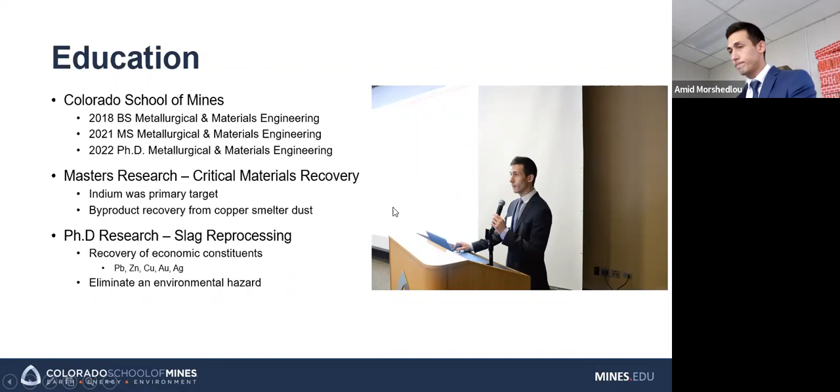For my professional background, in 2015 I interned for an oil and gas company called Extractive Energy. Most of what I did there was FSRU applications and a little bit of LNG, but mostly regas stuff. I did a lot of plant design, layouts, P&IDs, things like that. Then in 2017 and a little bit in 2018, I worked for a company called Verite Forensic Engineering. They were a small consulting engineering firm that did mostly failure analysis and fire investigations. For them, I did mostly metallurgical failure analysis.

And then I've also done a little bit on some tailings reuse in 2019. That was a project where we upgraded some silica.

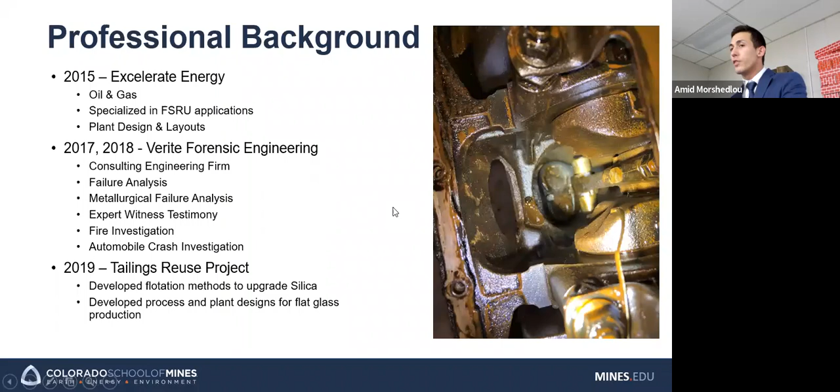And so with that out of the way, let's get down to the meat and potatoes. So this is the mining engineering seminar. I'm not going to pretend to understand to the level that y'all do about how to get things out of the ground. But a little review for what happens once things are out of the ground.

So we have extractive metallurgy. In most commodities, I have copper here as an example. There are two general categories: pyrometallurgy and hydrometallurgy, and there are exceptions or other processes. But shown here, I have two general processes for how you might process a copper ore body using pyro and hydro. In pyro, you normally start off with smelting. After that, you would go to converting, which normally just gets rid of iron and converts copper sulfide to a blister copper. From there, you would cast the copper into anodes, which would then be electro-refined.

On the hydro side of things, you would leach it, normally with sulfuric acid, but there are other solutions you can use. From there, you would go do some sort of upgrading step; solvent extraction is most common. After solvent extraction, you have a relatively high-grade copper electrolyte, which you would then refine using electrowinning.

So we're going to focus on this left side here. Most of what I do is use hydrometallurgical techniques on pyrometallurgical byproducts. So that begs the question: what are the pyrometallurgical byproducts? A really common one is slag, which is a product of most smelting and converting processes. At least with copper and other commodities, a converter slag is recycled back into the smelter, but that doesn't always happen.

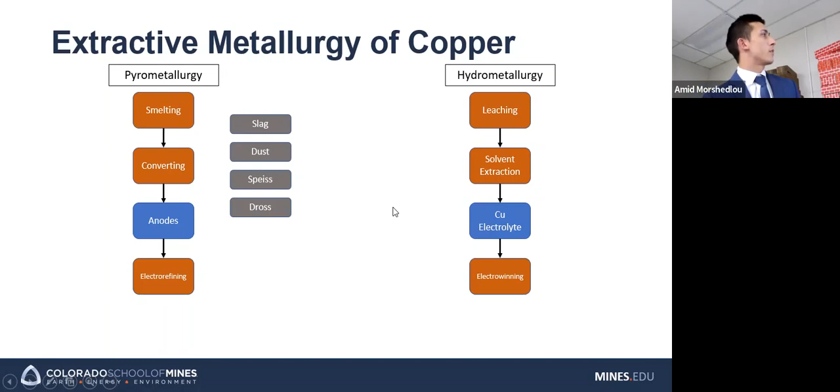So with that out of the way, I'm going to start talking a little bit more about some of the things I've worked on, starting off with recovering indium from smelter dust. And if y'all have some really deep and important questions about this topic, Joseph Troba here in the audience did his Ph.D. on this, so some of those might be best directed to him.

So a little bit of background on the overall goal of the project. This was sponsored by CMI, the Critical Materials Institute, and Rio Tinto, their Kennecott facility specifically, located in Utah right outside of Salt Lake City. The overall goal was to develop some methodology to economically recover indium from mid and/or waste streams in the Rio Tinto circuit.

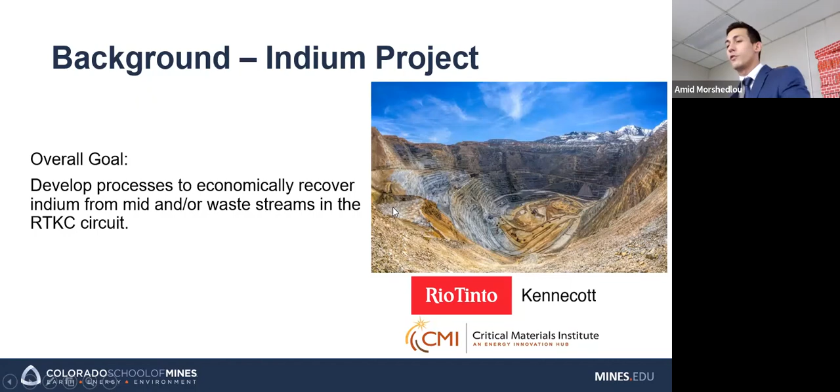So some more background on Rio Tinto. They can be categorized into four main components. There's the mine - you guys all know what mines do, so I don't have to explain that. There's the concentrator, which takes the ore and does comminution and beneficiation. Beneficiation is done through flotation at Kennecott.

The outputs of the concentrator are copper concentrates. Those concentrates get sent to a flash smelter and then to a flash converter. And the anodes that come out of the flash converting system are electrorefined into copper cathodes that are then sold off as a product.

So it begs the question, where in this system are we going to get our indium? Well, there's a few things we can look at. Early on, we looked at some of the samples in the concentrator. If we can improve the grade of indium going into the downstream processes, that's more indium we can target later on. We found that really wasn't going to be feasible for a number of reasons.

Primarily, the indium was not upgraded in specific mineralogies, so it would have been hard to process without some sort of chemical means. We ended up going after indium in the flash smelter.

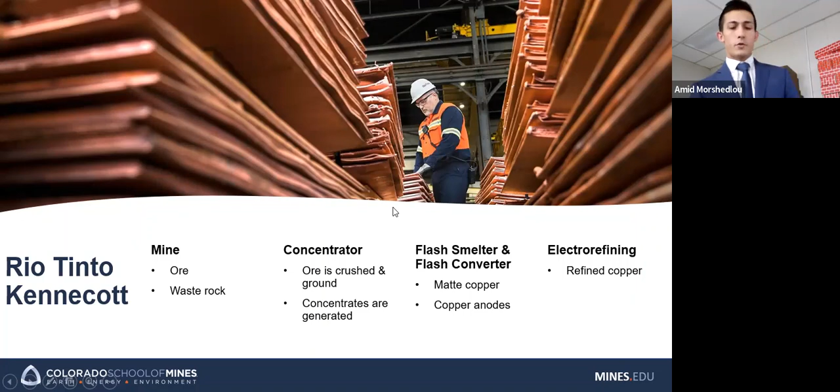This right here is a flow sheet of it, and what we took it from was the electrostatic precipitator specifically. So during the smelting process, some elements such as indium can become volatilized and will go with the off gases. Additionally, some of the ultrafine particles will just get carried away with the off gases.

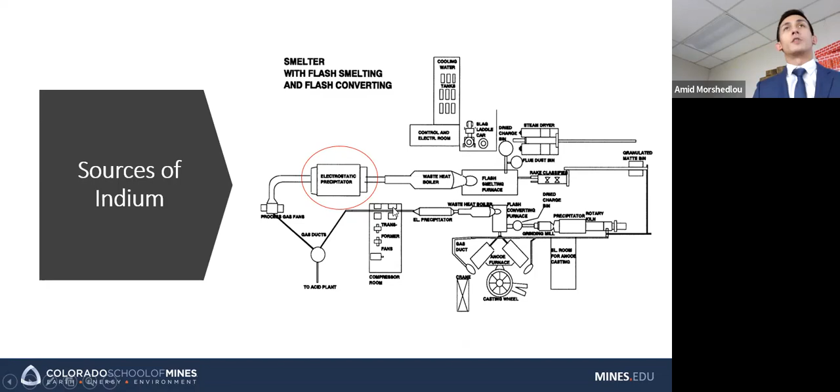Because of environmental regulations, these off gases need to be processed. Part of that processing is running them through an electrostatic precipitator, which does a few things, but the big one is it condenses some of the vapors into solids, and all of these already fine solids get collected so the gas can be processed relatively solid free. So that's the source of indium that we're targeting.

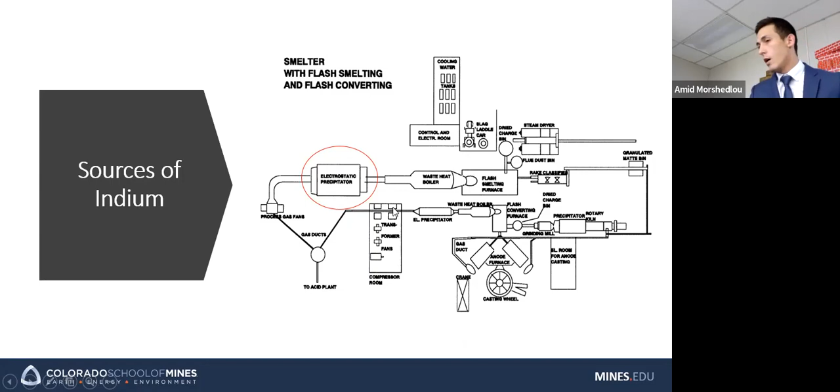And so what happens to this dust? Normally, if we don't do anything with it, ideally it gets recycled back into the smelter. That's because it's about 20% by mass copper, and Kennecott is a copper facility, so they want to process that copper because it's the primary product. But they can't, and that is because of bismuth and arsenic contamination.

Both bismuth and arsenic cause problems both in copper production and in the final copper product. On the refining side of things, they cause current efficiency issues and a variety of other things. In the final copper product, they can reduce conductivity, cause grain boundary wetting, and a variety of other problems.

And then also, cadmium is something we want to look at. That's because another target of the project was to produce cadmium telluride, and we need cadmium to do that. So with this material specifically, what are our general goals? Well, one, we want to recover indium - it's the primary goal.

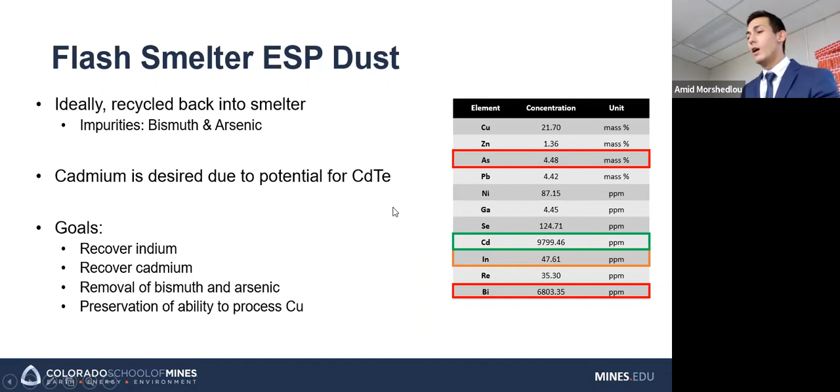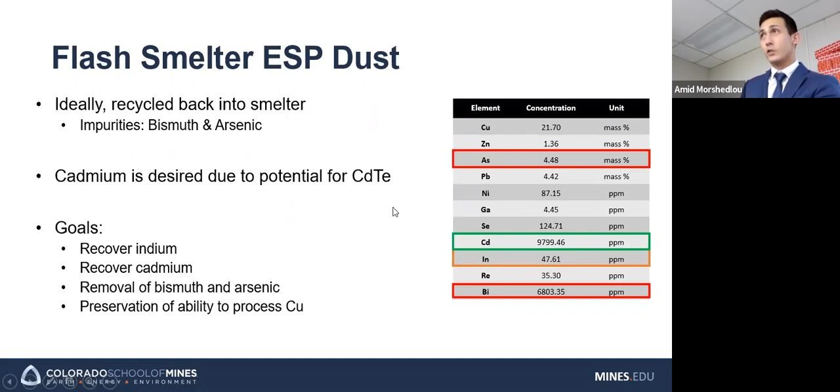But we also want to recover that cadmium. We also want to remove bismuth and arsenic because it inhibits copper production. And we also want to preserve the ability to process copper, since copper is the primary product. So whatever we do to this pyrometallurgical dust, we need to do it in a way that the primary economic driver, being copper, can still be the primary economic driver. So what do we do?

We looked at a few things and settled on water leaching. The reason this worked is there's a pretty high sulfur content in the dust already, and also some of it was copper sulfate. So what happens when we subject the dust to water is we get some of the sulfur reacting with the water to form some sulfuric acid, not much, but enough to get the job done. And so we get two products from this, a leachate and a residue. The leachate is the aqueous phase, it's the solution, and the residue is the solid material left behind.

These percentages I'm showing here are recoveries, the amount of material that reports to each phase. We can see that we're getting a good chunk, over half of the copper going to the leachate, with about a quarter of the cadmium and not much arsenic. So the leachate is mostly copper. On the residue side of things, pretty much all the indium stays there, most of the cadmium, all of the bismuth, and the majority of the arsenic. And then there's also a good chunk of copper there as well.

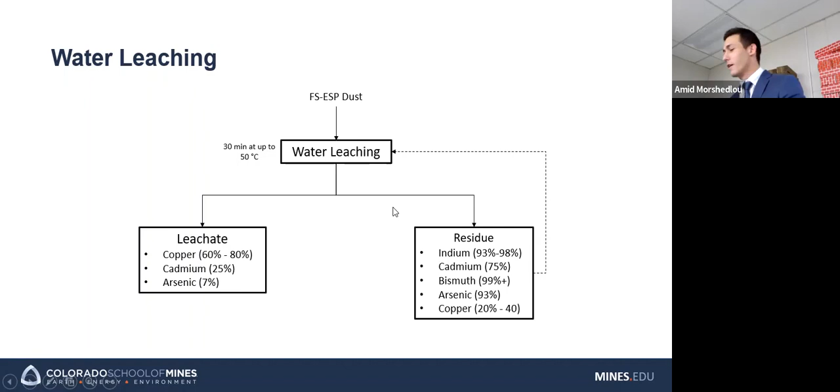And so from here, further processing can be done. Joe can talk about this if y'all are interested, so reach out to him later. So this is one of the things that we looked at.

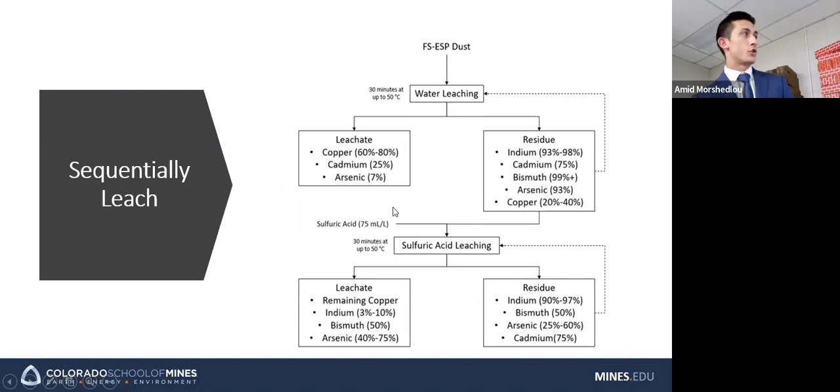Another thing we looked at was doing water leaching first. From here up, it's the exact same as the last slide I showed you. But what we'll do is take this residue and leach it with sulfuric acid. And so the remaining copper goes into solution, along with some of the indium, half of the bismuth, and a good chunk of the arsenic. The residue gets upgraded in indium, and some of the impurities are reduced, and cadmium still pretty much stays there.

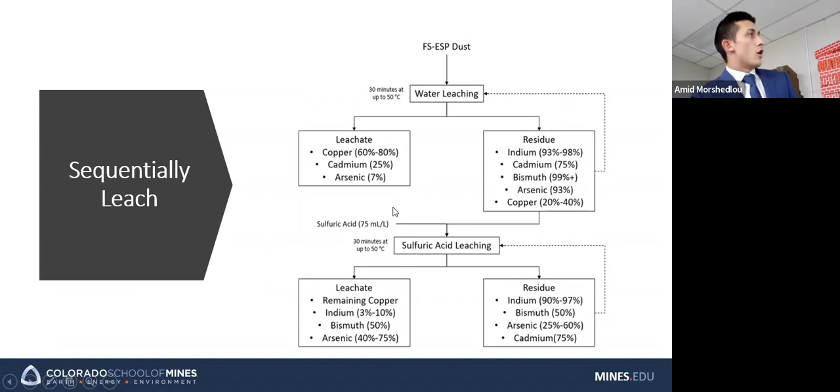One of the benefits of this is the remaining copper gets converted to solution so that it can be processed that way. A downside is the bismuth and arsenic go along with it, so that may not necessarily make sense. That said, if you're going to recover the indium, you need to do some sort of processing to this residue anyway. And again, that's what Joe looked at.

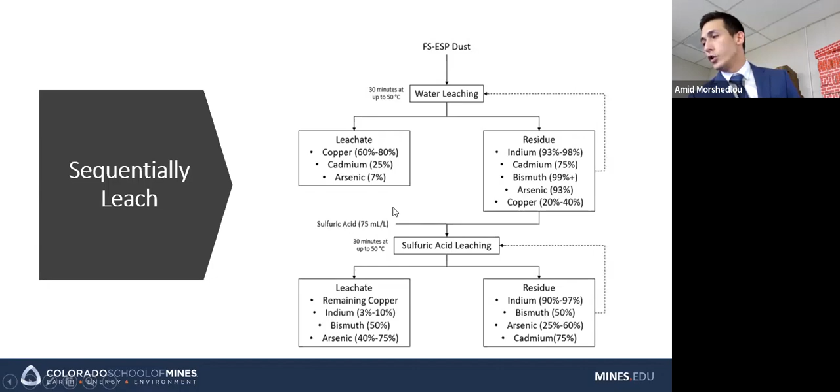So on to the next thing. We're going to talk about recovering some constituents from slag, which is what I'm working on right now.

We are working on slag from La Oroya, a metallurgical complex that was operating in Peru. The overall goal of this particular work was to develop methods to process their slag and recover a variety of valuable constituents in that slag. It was sponsored by the Center of Mining Sustainability here and a university in Peru called UNSA.

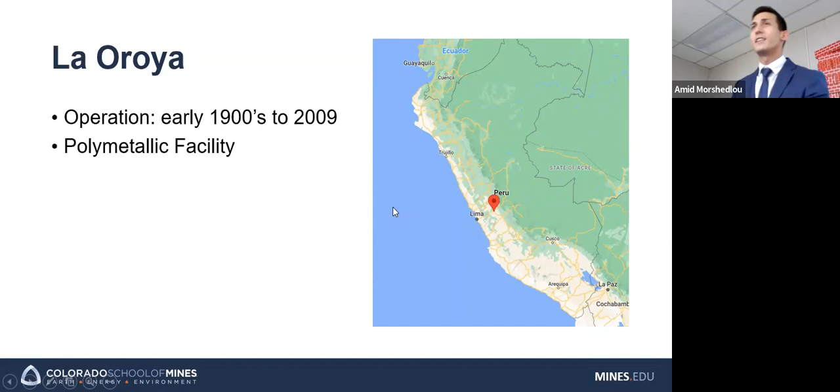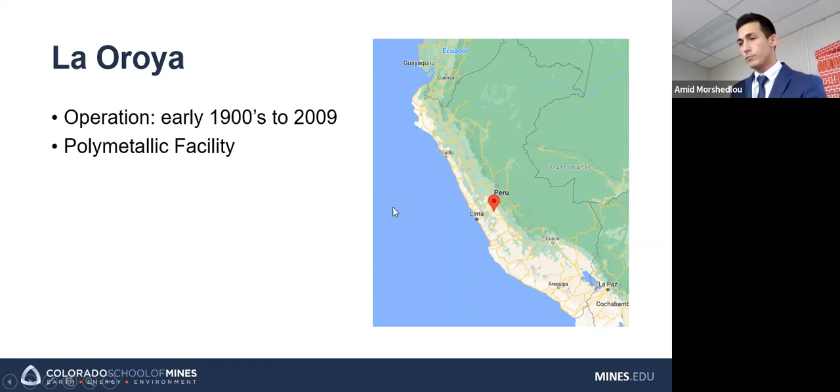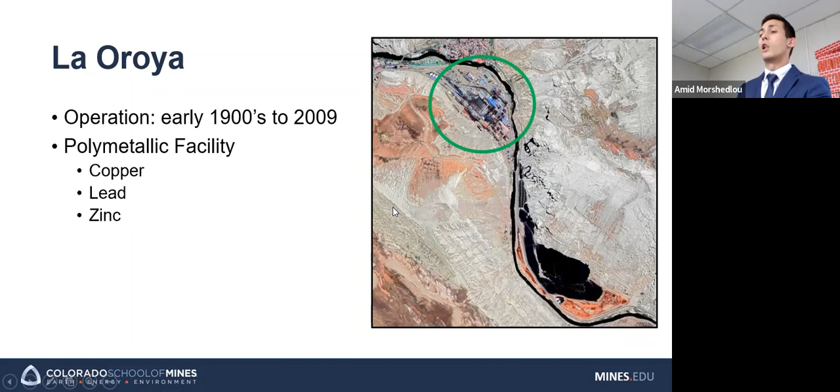So like I said, it is a polymetallic facility, and its primary products were copper, lead, and zinc, but it also produced a fairly high number of byproducts, including gold, silver, cadmium, tellurium, bismuth, indium, thallium, arsenic, etc. There's a number of them. And so, like I said, it got shut down in 2009.

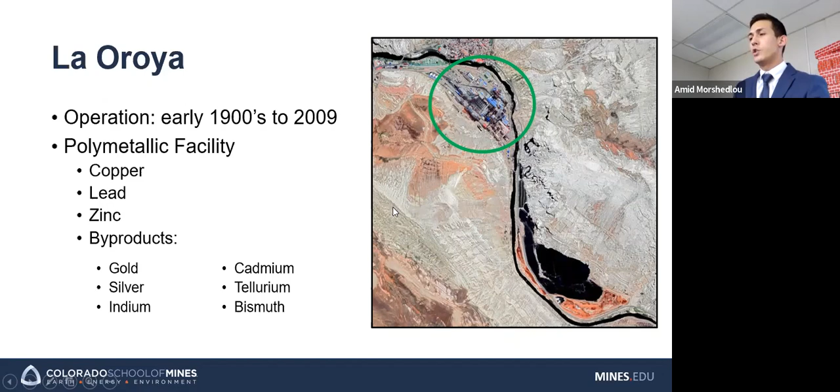So the slag created two environmental issues. One is that it would release toxic elements into the atmosphere through mechanisms like acid rain. Also, some of the slag particles were pretty fine, so you would get quite a bit of dust pollution into the area, and that causes a variety of issues.

So where did the slag come from? Well, this is a polymetallic facility, and two of their primary products are copper and lead. This particular slag pile is a 60-40 split between copper slag and lead slag. The copper slag is from their copper reverb furnaces, and the lead slag is from their blast furnaces. There's about 14 million tons of this stuff.

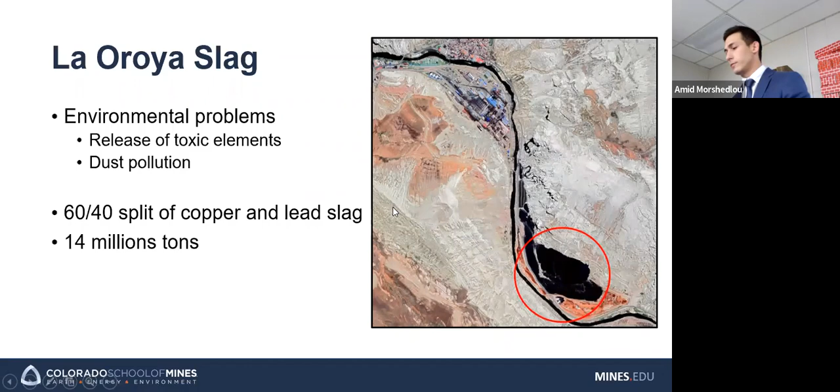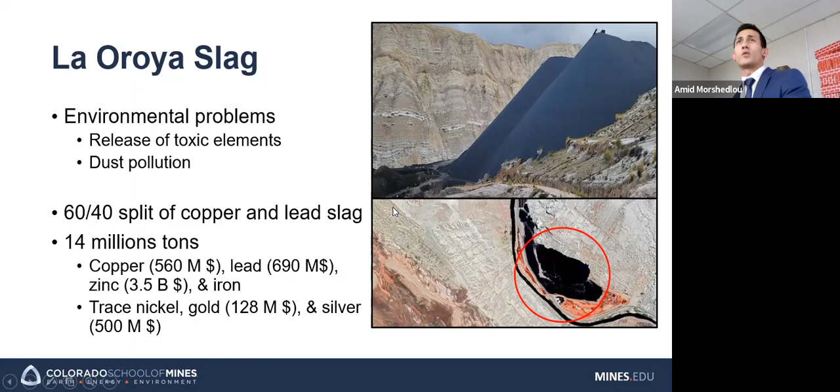So what's in this pile? There's copper, lead, zinc, and iron as the big components. There's also some trace nickel, some trace gold, and some trace silver. For reference, the gold and silver values shown there are calculated at 1,900 an ounce for gold and about 22 an ounce for silver. I haven't checked prices recently, so I don't know how realistic those numbers are right now, but just so y'all know, those are the prices I used to calculate those values.

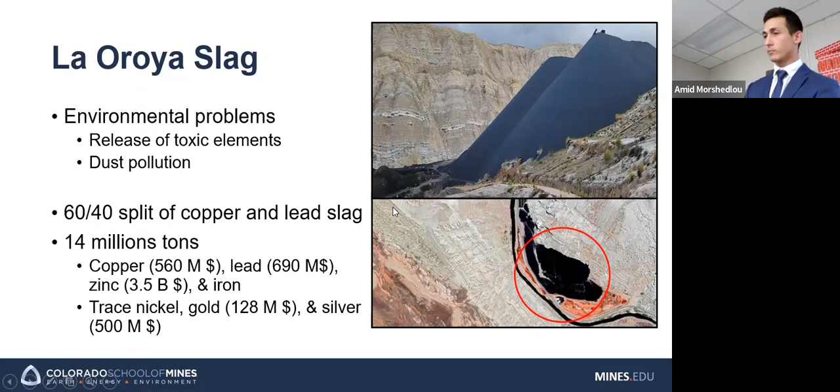How are we going to process this slag? Well, I've already talked about pyro and hydro metallurgy. In pyro, there's roasting, fire refining, smelting, and converting—and smelting was what was used to generate this slag. On the hydro side, there's leaching, solvent extraction, ion exchange. We could also do precipitation or some other precipitation-similar process like cementation.

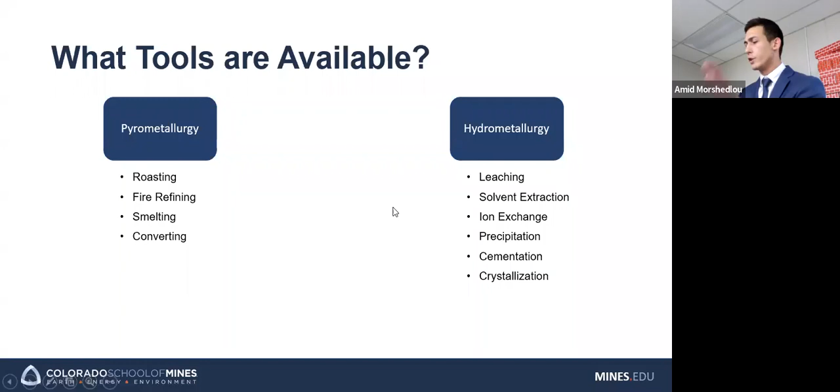But regardless of which route we go with, we can also do pre-concentration using mineral processing. That would likely involve some sort of flotation or maybe magnetic separation. These are the general categories, the tools we can use to process this material.

Ideally, we would like to do some sort of pre-concentration with mineral processing. That is going to be a little bit difficult in this case because the slag is amorphous, which means there's no long-range crystalline structure, which also means there's no long-range order to give us predictable properties that we can take advantage of for mineral processing.

So there are two ways we can get around this. One is to grind it really, really finely to take advantage of the existence of any potential short-range properties. Alternatively, we could heat it up, get some solid-state diffusion going, and devitrify it—make it crystalline—so there are properties we can take advantage of on a longer order.

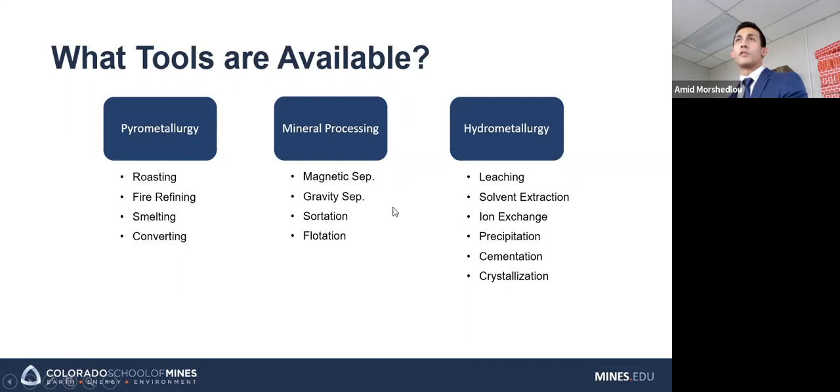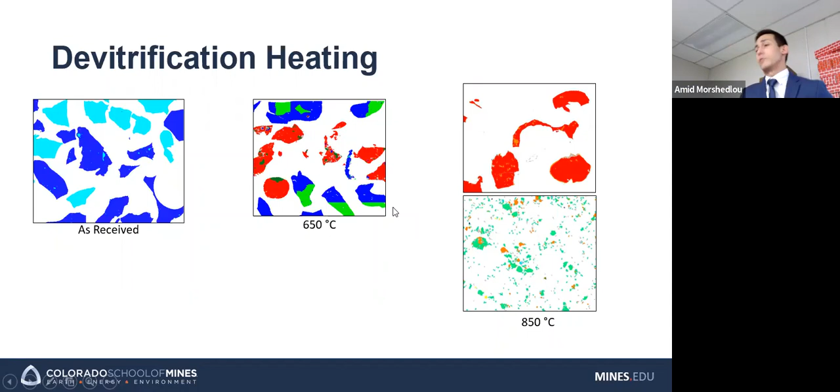So this tells us a few things. One, it tells us that we are getting some devitrification—we are getting some crystallinity in this sample, which is good, that's what we want. But at 850 for 2 hours and then furnace cooled, it tells us that devitrification is pretty slow. And we can look at Fick's second law to help us with this.

Diffusivity is equal to some intrinsic diffusivity, D naught, multiplied by e to the power of negative Q, which is some activation energy, divided by RT, where T is temperature. So what this tells us is that as a function of temperature, diffusivity goes up and asymptotically approaches some maximum based on the intrinsic diffusivity and the activation energy.

So what this means is we can only jack up temperature so high and continuously get benefits—we get diminishing returns when it comes to improving diffusivity as temperature goes up. Also, from a practical perspective, increasing temperature means increasing the cost, so it doesn't necessarily make sense to do this if it's going to be expensive. Another thing we could do is just melt it and let it cool down, but at that point we might as well just go with a pyrometallurgical process.

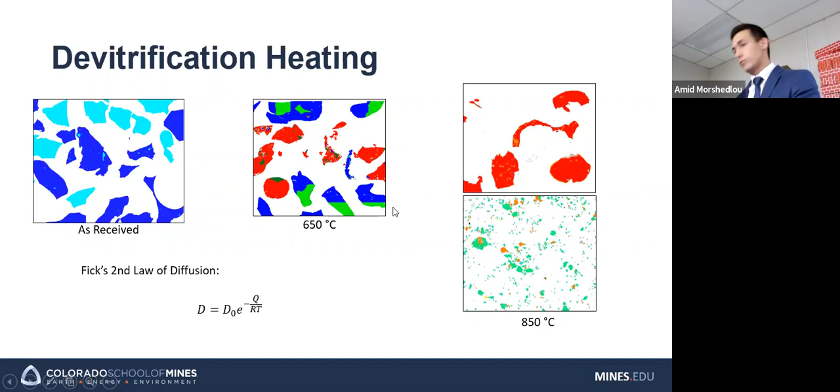Because of this, we ruled out mineral processing methods and pre-concentration and decided to go straight into leaching. So we've come up with a general process to do this, and it starts with a sulfuric acid leach.

From there we get two products, a leachate and a residue. The copper and zinc form sulfates, which are soluble, and those report to the leachate. The lead also forms a sulfate, but lead sulfate is not soluble, so it remains in the residue.

To the leachate, we're neutralizing with sodium hydroxide. You could also use soda ash or any other basic reagent, it doesn't really matter. Then we're adding some zinc dust to cement out the copper and the iron.

The reason for that is iron causes some problems later on in processing. If we can get it out of the leachate, it just makes things easier. That's due in large part to the multivalency of iron, which makes other processing kind of difficult.

So we add some zinc dust to the leachate and cement out the copper and iron. Those cemented solids we can feed into the existing copper pyro circuit, specifically the converting furnace. The iron in the converting furnace isn't that big a deal, it'll just oxidize off and go to the slag.

What we're left with after cementation is a solution that's basically a zinc electrolyte. The grade of zinc there is higher than the zinc electrolyte La Oroya uses, so we can mix that in with no problem. That just goes to the existing zinc electrowinning circuit.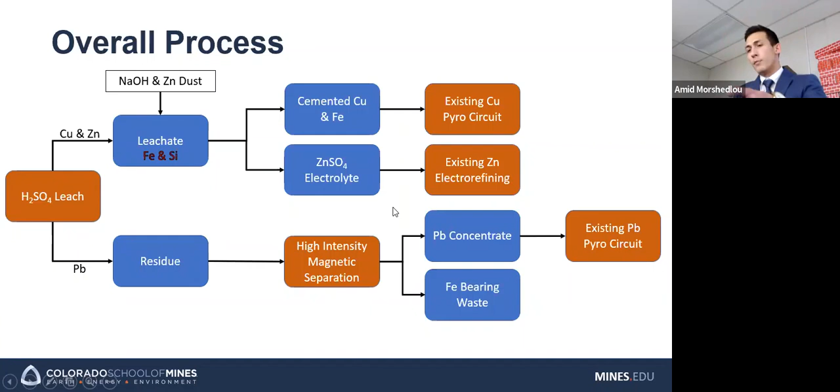So that's the overall process. How do we optimize things? Starting off with leaching, we do our initial tests to get an idea of what's happening, then we get more data.

With additional data we can create a statistical model, and that helps us run statistical analysis. We can figure out which process variables make a difference and hopefully figure out why. From there we can plug things into a metallurgical simulation software, and that'll help us with the statistical model to determine some variable effects.

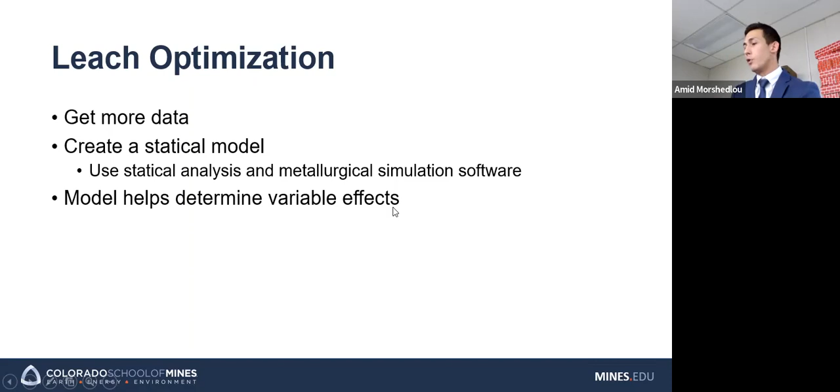So for example, on the statistical side of things, here we have some response surfaces for leaching. On the left we have copper recovery to the leachate, and on the right, silicon recovery to the leachate. Ideally what we would do is maximize copper recovery while simultaneously minimizing silicon recovery. This model can help us figure out the best way to do that.

And so what we can see is as we increase temperature, copper recovery increases. When we go from 25 degrees Celsius to 80 degrees Celsius, we see a slight increase, but not all that much. Same thing as we increase sulfuric acid concentration, which makes sense intrinsically - more acid, we can dissolve more copper. And by increasing both simultaneously, we can push up copper recovery even higher, which is what we want to do.

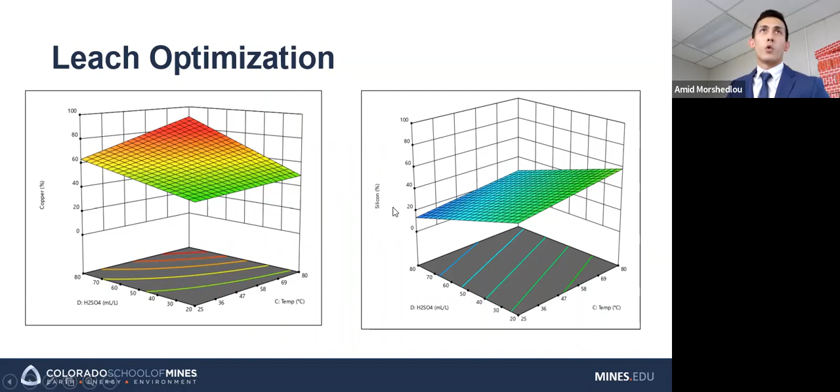And we can do the same thing with cementation. For those that don't know what cementation is, it's basically a heterogeneous precipitation reaction, and it relies on differences in nobility. So if we take a material like copper, which is very high on the galvanic series...

It's more noble. We can add in a metal that is less noble, like zinc, and what will happen is we'll get a reaction that is based on those differences. Zinc will go into solution and copper will solidify as a solid. The same thing happens with iron. This is why we can use zinc to precipitate out copper and iron in solution.

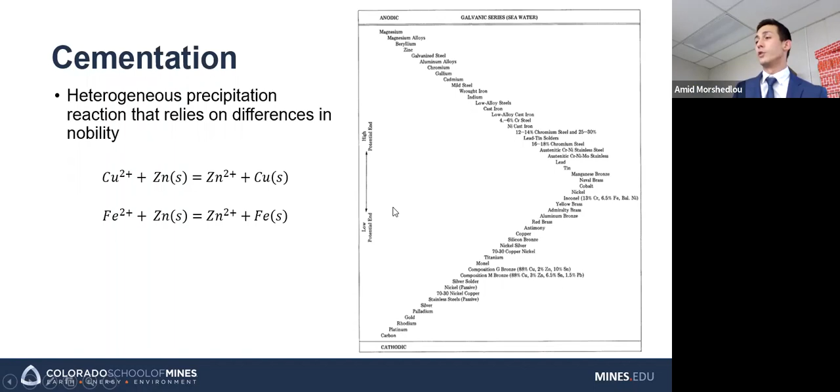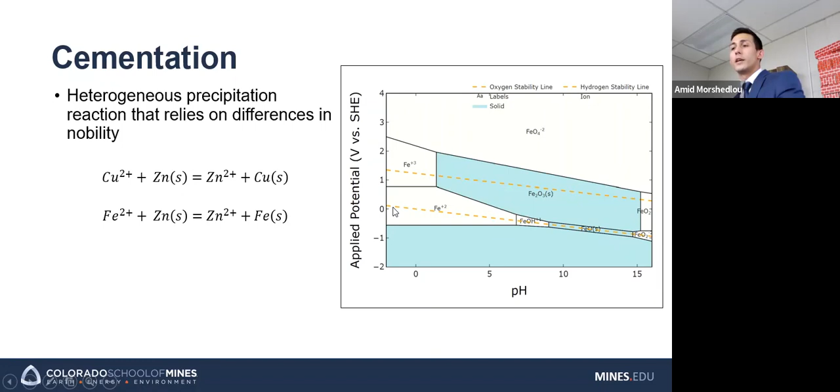And one thing to note, as I talked about earlier, iron is multivalent. We have Fe3+ and Fe2+. Ideally, we would like iron to be Fe2+. And so what we can do is modulate pH and the applied potential to keep iron in the 2+ region so that we can get better iron cementation.

So right here, we have the same response surfaces. We have copper on the left, iron on the right, and this is grade in the solution afterwards. In both cases, what we want to do is minimize the grade. We want low copper in solution and low iron in solution, because we're trying to take it out of solution so that we can feed those elements in somewhere else, while we take that solution and recover the zinc from it, free of copper and iron.

So what we can see in the case of copper is as we increase the amount of zinc dust that we add, we drop more and more copper out of solution. This is pretty much what we expect. And with pH, we can see that as we increase the pH and keep the zinc dust low, we'll get a drop. The opposite occurs when we keep the zinc dust high.

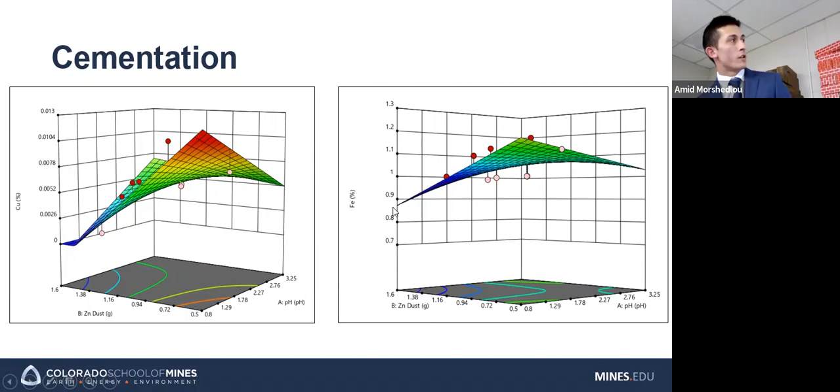And so on the iron side of things, what we can see is, generally speaking, as we increase the pH, we'll drop more and more iron out of solution, which is what we expect based on the E-pH diagram. Same thing, as we put in more zinc dust, more iron drops out of solution. This is what we would expect, because zinc is what's dropping iron out of solution.

So again, what we can do is take these diagrams and help us better inform what sort of processing conditions we want to use to get the results that we want.

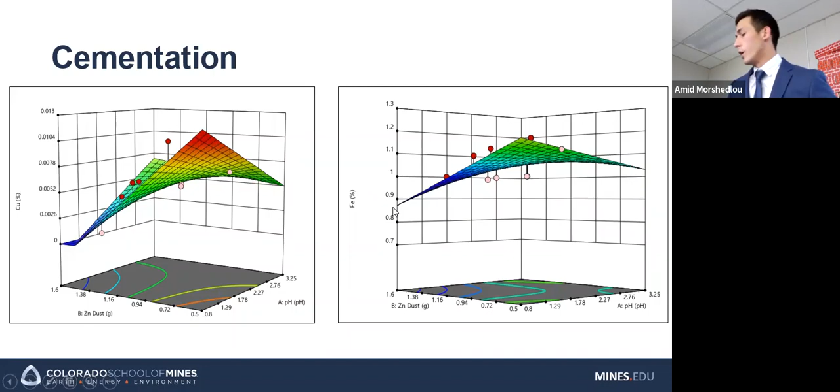So it begs the question: how do I know that this is going to work? I'm taking some material streams and plugging them into circuits that already exist, which I don't really have access to. For practical reasons, I can't make them on a smaller scale.

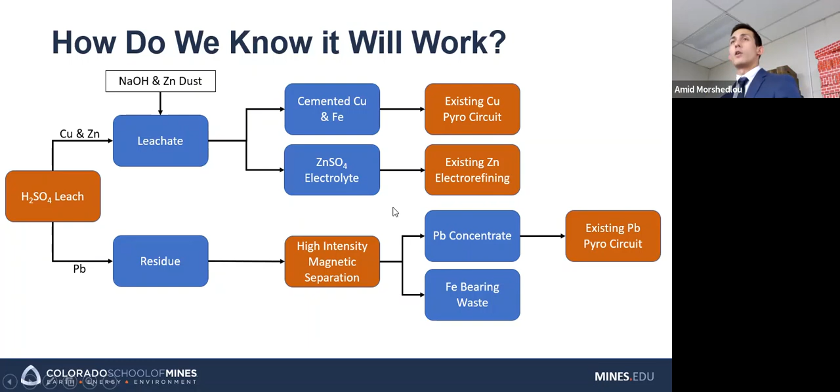They're too complicated and would require too much resources. So what we can do is make a model of things, which is what I talked about earlier. The software we're using for that is called METSIM. It's a general all-purpose metallurgical processing simulation software, and with it we can simulate pretty much any metallurgical system we can come up with.

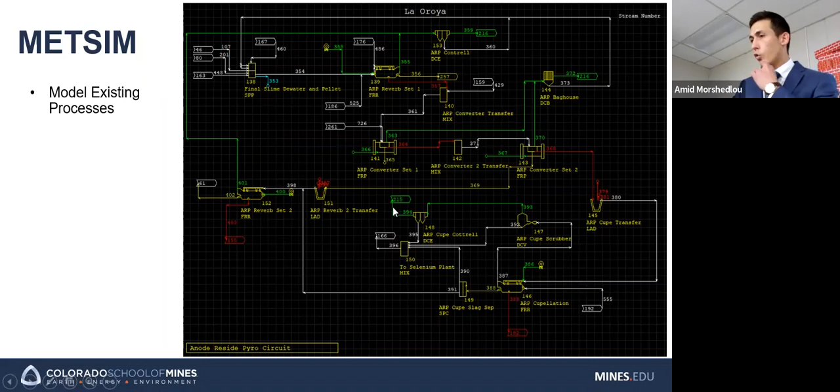So what we do with it generally is: first we'll model the existing processes that already exist, then we'll model the new processes, then we'll take those two models and integrate them together. And then we can see what happens.

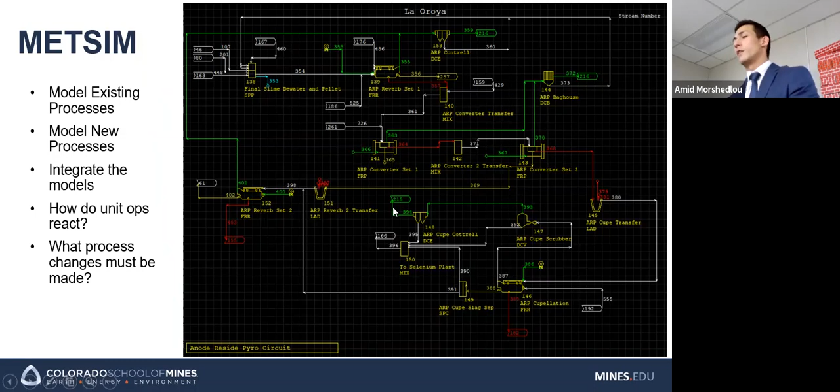If we take a stream from the new process and feed it into some unit operation in the old process, we can see where that material goes, what happens to it, and how it affects everything downstream. We can also figure out what process changes need to be made. This enables us to figure out potential problems before things make it to the real world, so we can deal with them before they happen. That means if this gets implemented, theoretically everything goes smoother.